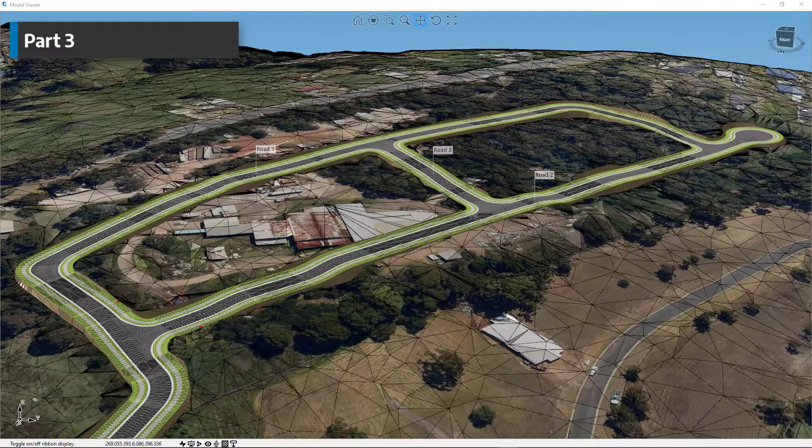In this series of videos, we're going to unpack the various alignment types which are offered when we run Project Assist. Now, rather than run through the entire list in one go, we're going to unpack them gradually over the course of this short series of videos. The aim of this is to develop the knowledge of the alignment usage types and at the same time see how they can be applied in context to a real design.

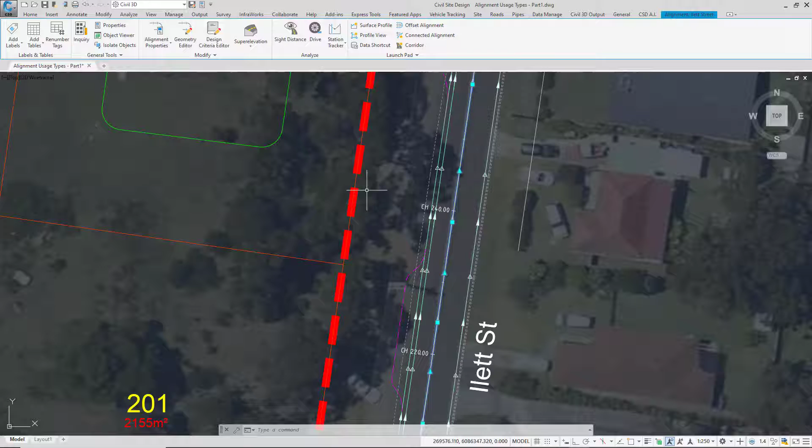So for each video, we're going to be adding to this particular project and exploring more of the alignment types as we go. We have created 4 alignments in this project to begin with, and these are all going to be building the framework of Ilett Street. So we have the main centerline alignment, which is along the existing centerline or crown.

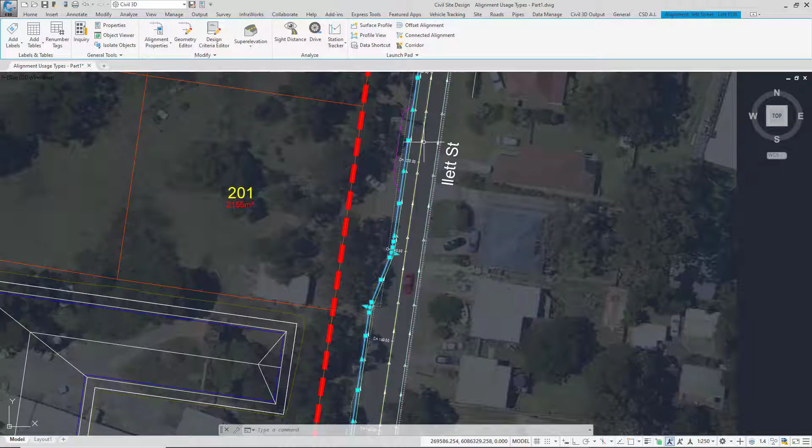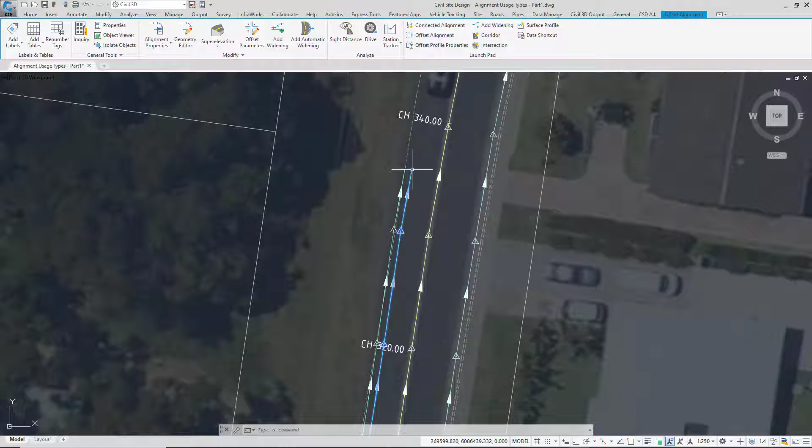We have a left edge of bitumen alignment, which will be where our proposed edge of bitumen will finish. We also have a proposed right edge of bitumen alignment. And lastly, we have an alignment which is representing the saw cut. And you can see both the saw cut alignment and the left edge of bitumen alignment actually stop well short of where the main road string will be finishing.

We've also created a template. So this is the template which will be applied. Fairly straightforward, but the REB and LEB will be controlled using the alignments. The saw cut, as you can see, is not actually in this particular template, and the reason why is because Project Assist will actually add the saw cut in as a variation and interpolate the elevations between the centerline and the LEB. The remainder of the template will stay the same.

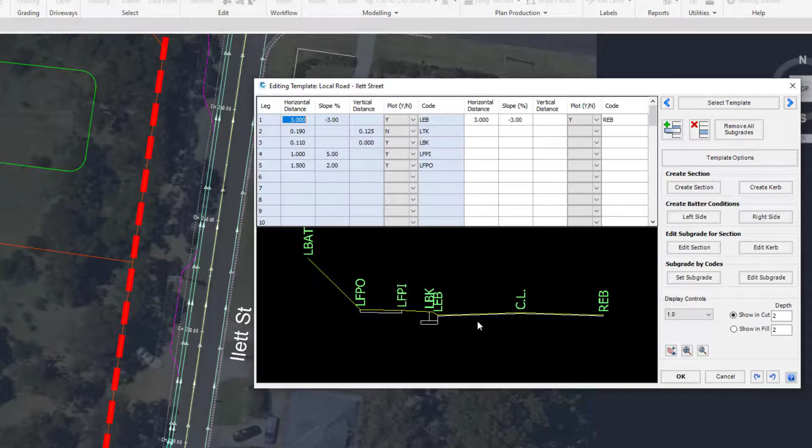Let's run Project Assist. So the first thing to note is that when you run Project Assist, the types that are chosen on the right hand side are based on the AI reviewing your alignment name and the position of it within the drawing. So it's determined here that Ilett Street should be a road string from the list.

It's then determined that the left edge of bitumen and the right edge of bitumen alignments are likely to be road edge connection or string control, which they are. They're going to be controlling the edge of our template. The saw cut, as you can see here, has been picked up as saw cut control, and we'll see the result of choosing saw cut control in a second.

A word of caution though, if you decide that you do not want to use a particular alignment within the workflow, what you do not do here is pick nothing, because nothing is actually telling the AI that if it ever sees a particular alignment type listed in here, that it shouldn't ever use it or determine that it should be used later. In a second, when we're in the workflow manager, you'll see we can actually choose ignore, and that's what you should be using to not include an alignment in your particular design.

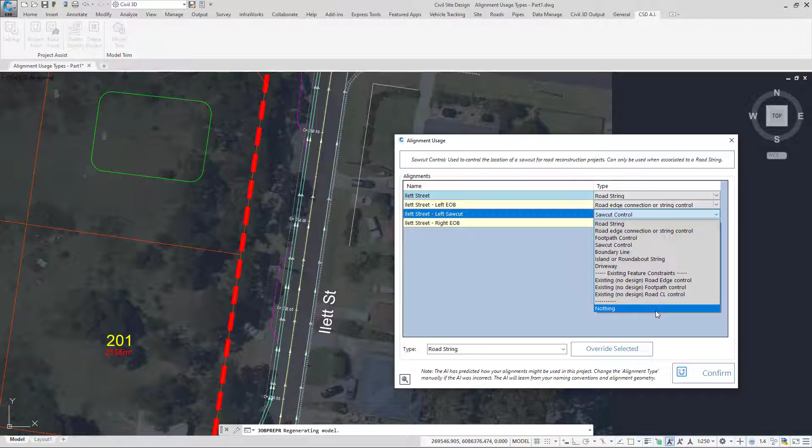An example of where you may pick nothing is for an alignment that maybe was generated by auto curve returns, an alignment that's maybe been created for plotting, or maybe an alignment that you have used for pipe design. Typically these would not be used within the workflow, and therefore you would maybe go and choose nothing. Let's click confirm.

In the workflow manager, we'll always have the main road string listed at the top, and then any alignments that are also associated with that road string will be listed underneath. The first thing you should always do is go and make sure that you have your template selected for your road string. The AI will not select what it believes to be an appropriate template. This is something the user must do.

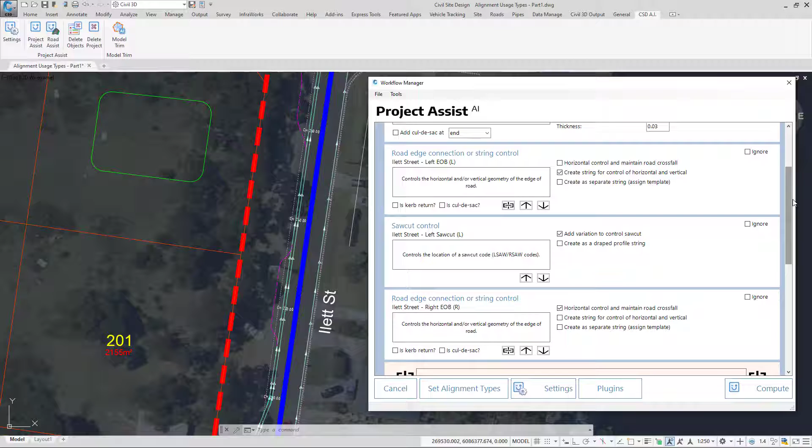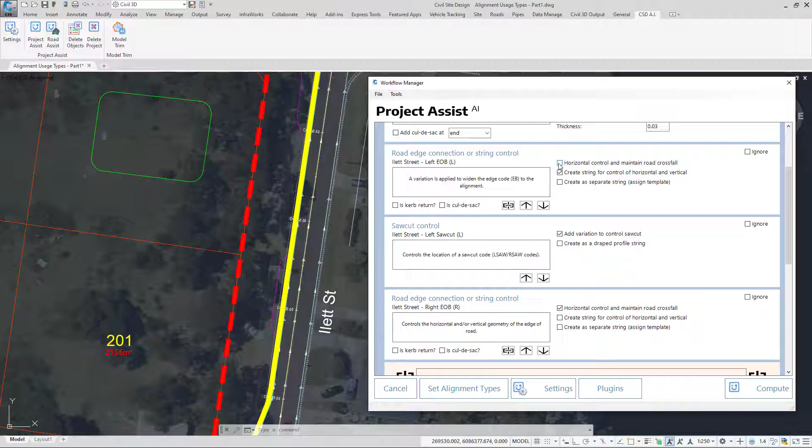Once you've selected your road string template, you can then go and choose how each of the alignments that is associated to that road string should function. So for the left edge of bitumen, we have the choice of maintaining the current road crossfall and simply positioning the code, in this case the LEB, onto that alignment. We can also have the LEB placed on top of a string, which is created by Project Assist for us in the background. Underneath that, we can then decide what happens with the saw cut.

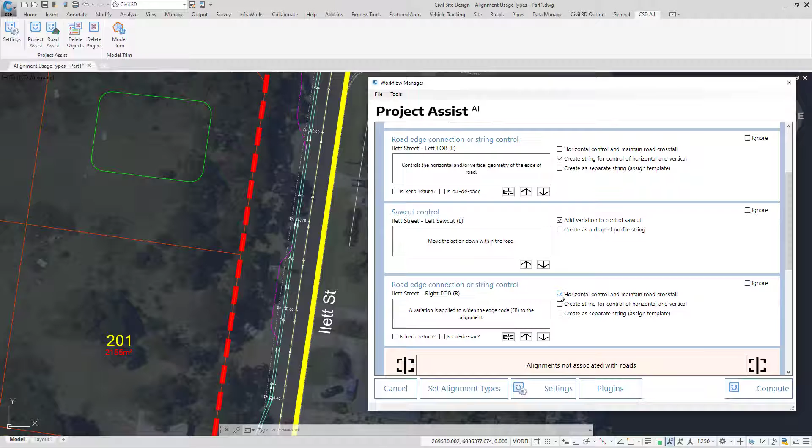Now, because we have no saw cut on our template, the software will add one in as a design variation for us, interpolating the levels between the centerline and LEB. Lastly, we can choose what happens with the right side, and the right side in this case is simply going to be positioned onto the alignment whilst maintaining its current slope. Now at this point, all we're going to do is click on compute.

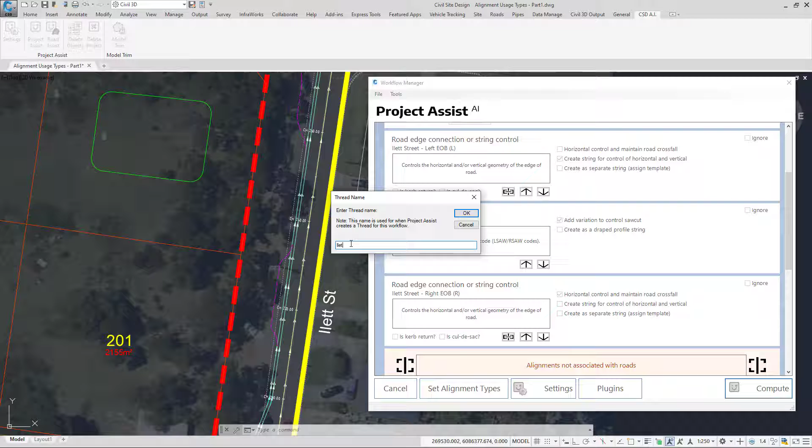Now, depending on whether or not you've checked the box on in the settings, every time I run compute on my particular workflow, I'll be prompted to name a thread which will get created in the background. So we're just simply going to call this Ilett Street, and then click OK. We'll just close down the PDF for the time being. Then we're going to go and open up the vertical grading for Ilett Street.

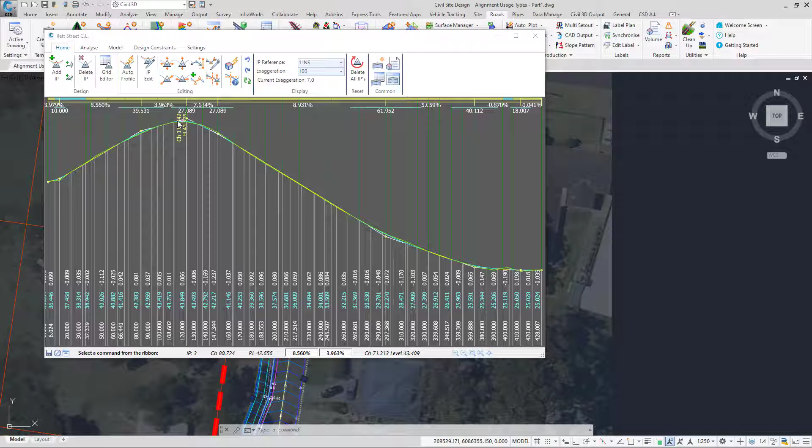So as far as the software is concerned, it's simply just created a road string for us, and it's generated vertical design that we'd normally expect to see. If we right click and open up a cross section, we can get a little bit more context as to what's going on. We're going to right click one more time and open up the section data form.

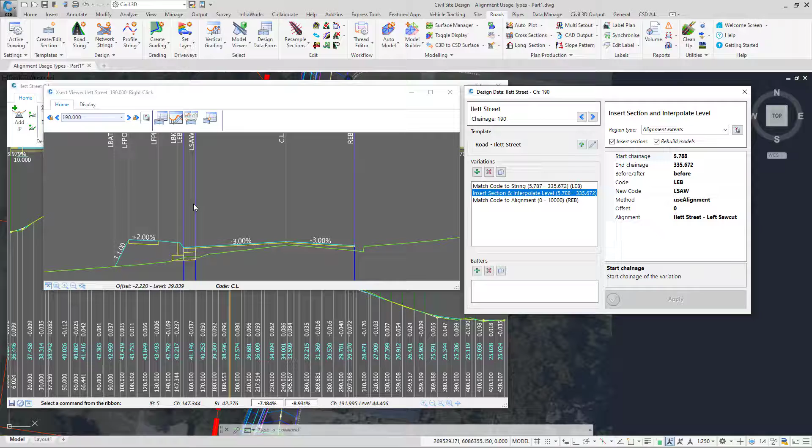So this shows us all of the different variations that have been applied to Ilett Street at this particular chainage, chainage 190. So first of all, the left edge of bitumen is being controlled by a string in offset and elevation. A saw cut code has been added in for us, and you can see that there. In addition, it is interpolating the elevations between the LEB and the centerline and being positioned using an alignment. And lastly, the REB is being positioned onto an alignment but just simply maintaining its current slope.

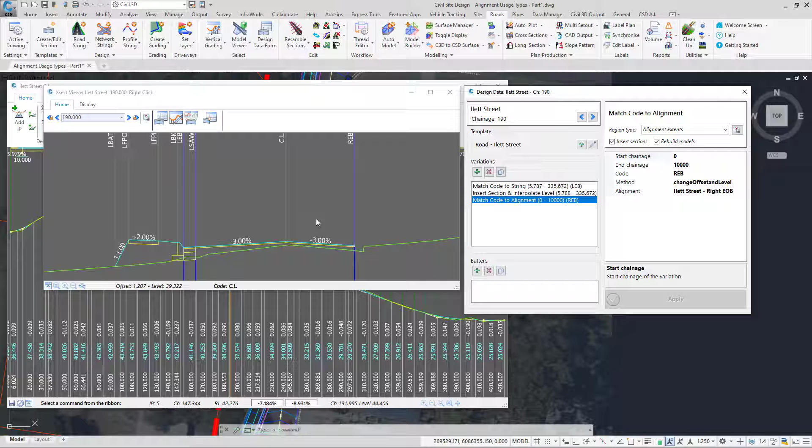So we're in a position now to actually start to edit this. So if there are aspects of this we do want or we don't want and we would like to change, we can actually start to go in and manage all of the content that's being created for us. Let's just very quickly look at the vertical grading of the LEB string.

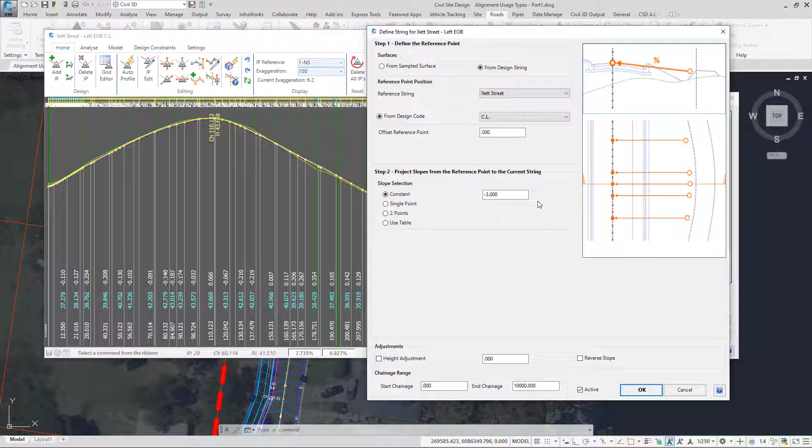So there's quite a bit that's happened here. First of all, we've got an auto profile entry with reference point. If you want more detail on how this gets created, have a look at the road widening playlist that we've created. In addition, we've also got design constraints being applied in the background.

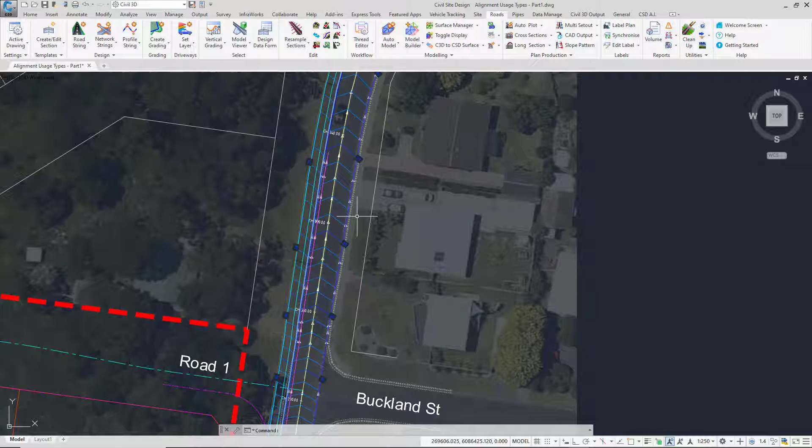So as far as these particular types go, you can see that the road string creates the main road. Then the road edge connection or string control is being used to manage the EOB codes, and then the saw cut control is being used to, in this particular case, add a saw cut into the road cross section for us.